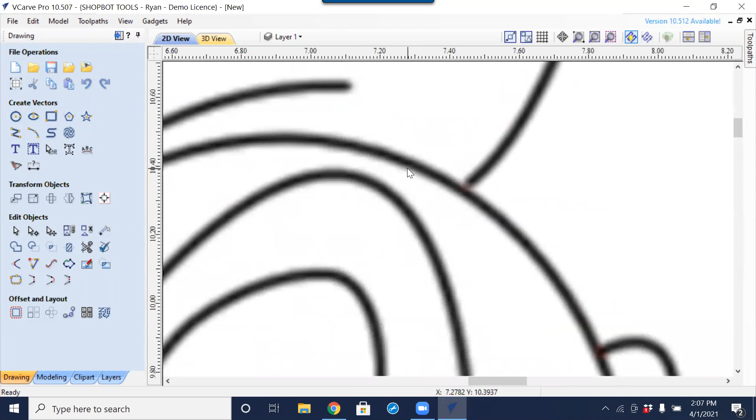This is a fairly clean drawing as far as the pixels go, so you might think this is going to be awesome for us to use the automatic tracing feature. And you would be right, other than the process to get all these pieces to fit - the automatic way ends up costing us a lot more work, and we'll see why in just a second.

So we're going to first do the automatic tracing to show you why it doesn't work, and what we would have to do to clean it up. Then we'll take a step back, undo all of that, and work the way we need to have it. VCarve does have an automatic way of making a bitmap trace, which works fairly well, especially on a clean image like this. I'm not going to adjust any details since we don't have too much noise - it's fairly clean. So I'm going to go ahead and click preview.

And it's done a decent job of it. We'll go ahead and apply. So it has created our vectors, and fairly cleanly. Even going into node editing, so we'll ungroup those. We see we have some nice smooth vectors that are going around.

But remember, we need to have these pieces fit together like a puzzle. And one of the things that the automatic tracing does is trace along the outside and the inside of the shape. So this would work great if we just wanted to do a V-carving of them. We're just going to see how that works, just to see how cleanly it would have worked if we didn't want to do the inlaying. And yeah, it doesn't look too bad. Looks like it would have done all right.

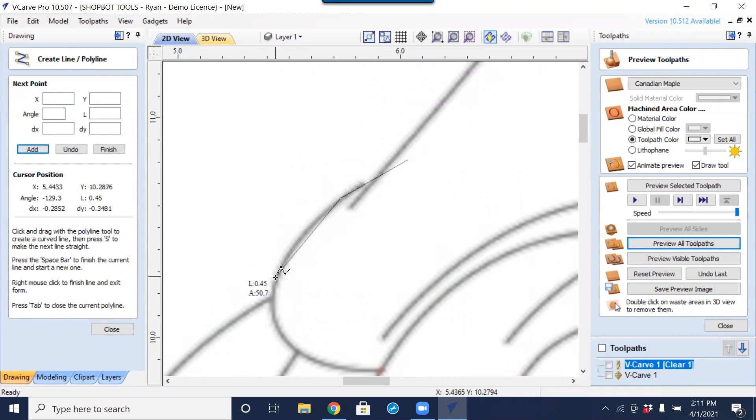So anyway, we're going to start right here, and I'm going to click out a little off of that part, just drawing out lines. I'm putting the lines in, and later I'm going to convert these lines into curves. So I'm clicking on the areas that I think are the start and end point of an arc. And I've already messed up. So let me back out and just undo and start all over again, because I want just the hat. I started going a little too far around the head there.

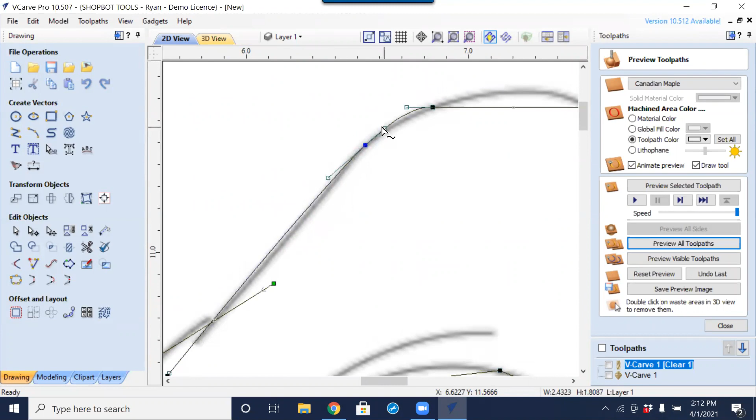And if you're not real precise with the placement of these endpoints, that is okay, because we are going to use node editing to later fine tune these shapes. So coming back to the beginning, there is the hat, going into node editing. And I'm not sure how I feel about the new method of when you're drawing, how you're able to draw lines and convert them to a Bezier as you go along. I'm not certain I'm happy with that.

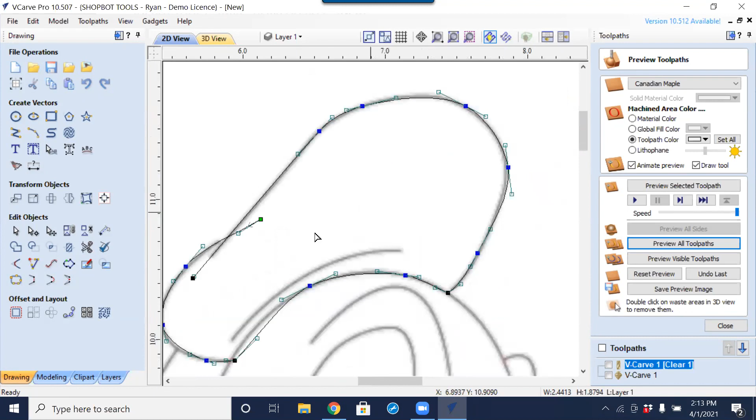But that is maybe just me. So I'm going around clicking the letter S, and the S is for smooth. I know that's smoothing because when I right click over top of a node, I see smooth point, and there is the S. So that means you could just hover your mouse over top of any node and it's going to smooth it out. And once we have that part done, the hat is about done. We're good with that.

Going to escape out of the node editing, use the scissor tools to trim away the overlapping sections there. Later we will put in maybe another vector here to do a V-carving on. But right now we're just separating the parts like a chunk for color separation.

Going to run through the same process. Tab. Again, if anyone has any questions while I'm doing this, please ask them. So at this point I'm not going to close out. I am going to just escape out of the line tool now and fit these vectors with those being overlapped.

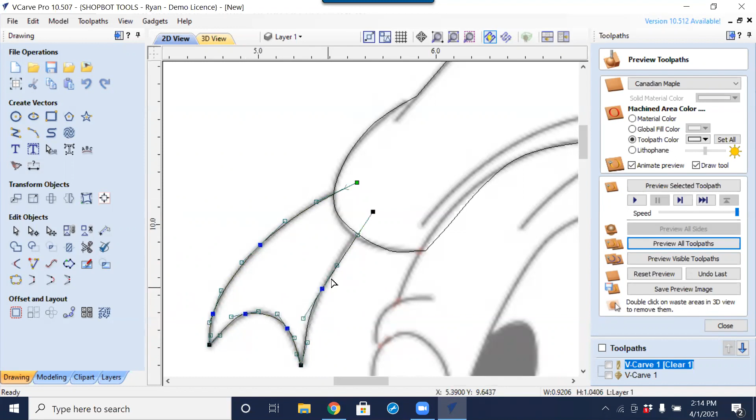So again, just using the S to smooth these shapes out and then move the control points to a location that best matches the shape. I'm going to modify, node edit the hat just a little bit more. I see it's off there a little bit, and also off the top of his head. Needed a little adjusting and fixing.

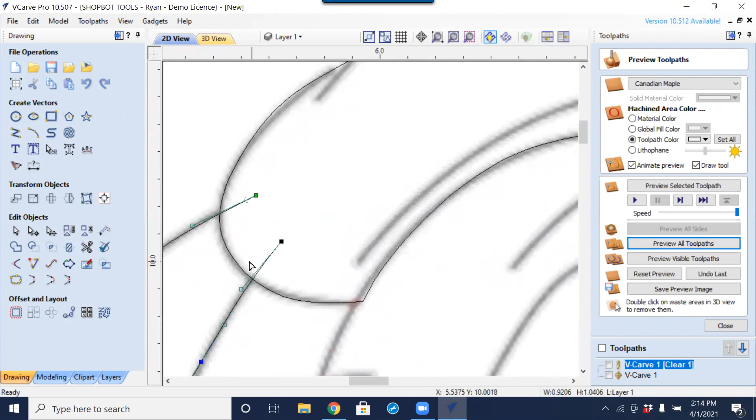So that is basically two shapes. Now, to ensure that we have the same arc for when we cut this tab out of a separate piece of material from the main part, we need to make sure that these two arcs are identical. So I'm not going to trace this line, we're just going to make a copy and duplicate it. So the way I do that... oh, look at that, I'm off there just a little bit more. So I'm going to use the right arrow to bump that over, and then there we go.

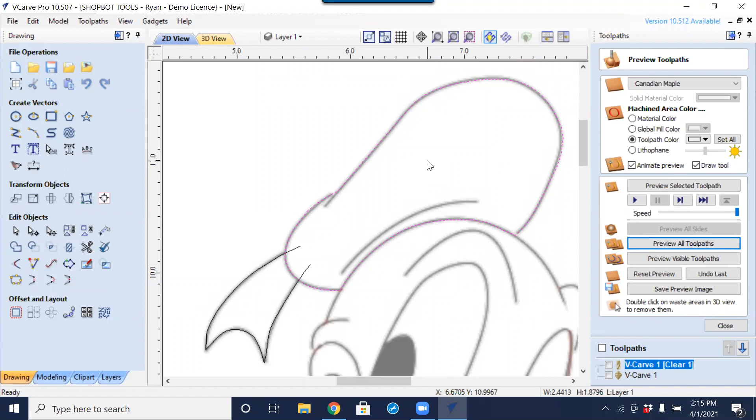Selecting the main outline that we have here, I'm going to do a Control C to copy that to the clipboard. If I did a Control V paste right now, that would paste a duplicate copy directly on top. I'm not going to do that just yet. I'm going to take a couple trimming actions, and then we will paste that back in.

Use the scissors to trim that section away. So we've lost the hat, or so it seems, and only have the connecting tail here. At this point is when I'm going to do the Control V, pasting that back in. So we now have the main hat, and we have overlapping vectors at this point, but that's exactly what we want, because later when we're finished with our design, we are going to separate them into separate pieces.

Let's work on the top of his head at this point. The way you want to think about how to do this is based on the material we're going to use. So we're going to trace around the top of his head, the top of his beak, up around his eyes, and finish the top of its head. Let's see how that works out.

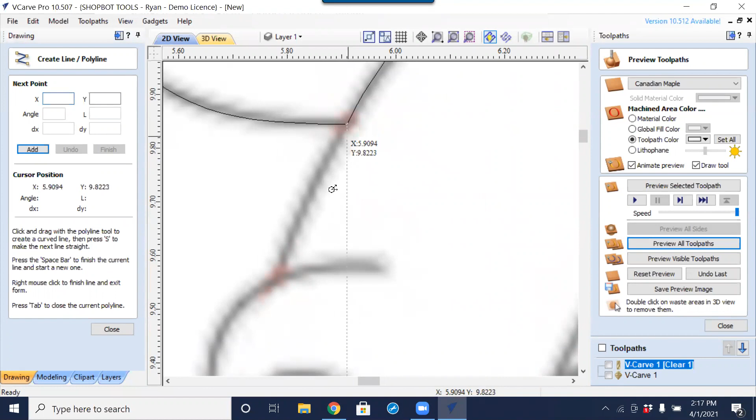I'm going to use the object snap to snap at the endpoint of that line. And this is where, see, that was that automatic tracing there, which sometimes is helpful, but for me, I prefer not to have it. There it is again, so I didn't want that to happen. I'll explain after I finish going through this what is going on with that. I should have paid a little more time to see if there's a way to shut that feature off.

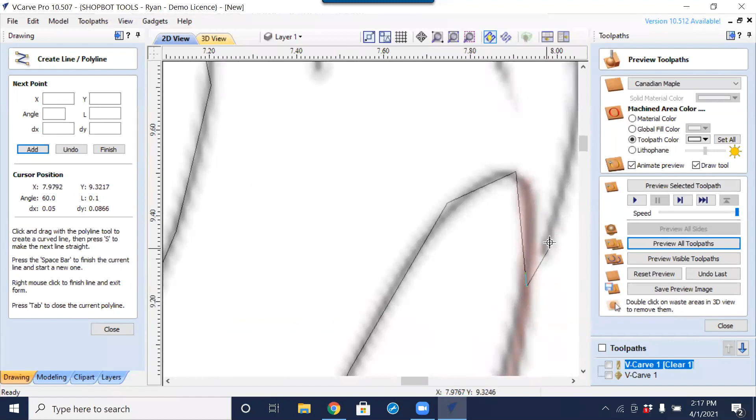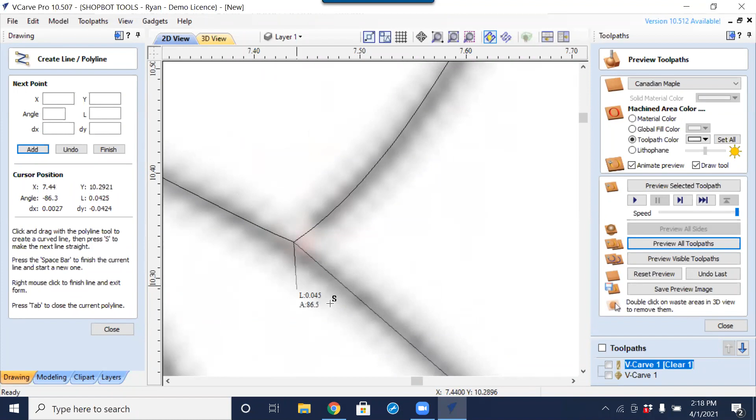So zooming in is the scroll wheel, zooming out is also the wheel. Holding the center button down allows us, when we're zoomed in, to pan around. I am going to snap right there to the endpoint of that. I'm going to escape to close the line function tool and run the same type of node editing that we were doing before.

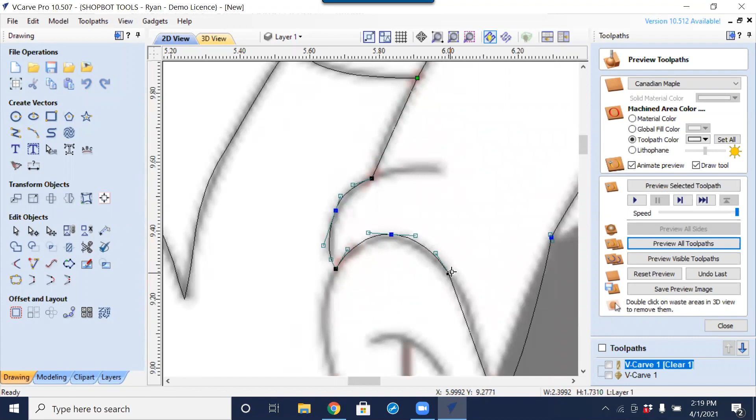So I didn't do a smooth, I did an arc there. Sometimes I do not a smoothing, sometimes I do an arc to get that somewhat close, then come back, convert those two arcs back to a Bezier curve, then smooth. Sometimes it saves a little bit of steps. See here, I need more of a sharp point there, so I'm going to convert this line segment back to a line. And then we could go about smoothing.

It is possible to do a sweep select and smooth more than one node at a time. So we could select both of those and just type the letter S. You don't have to do them individually, although I tend to do that most of the time.

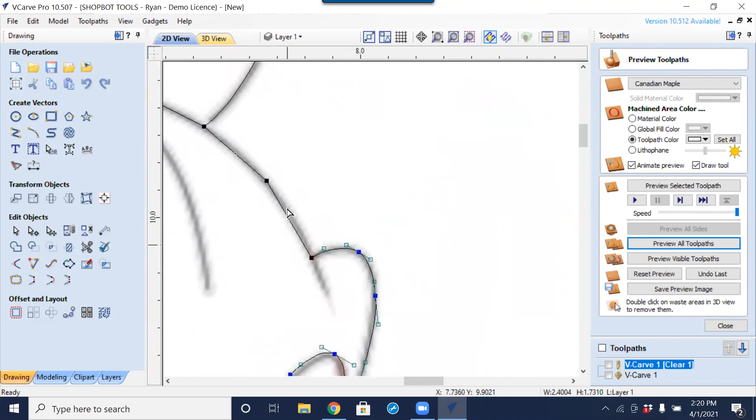I'm not sure I understand the question, but I think the answer is yes. There's probably a way of doing that with the automatic trace. So I could go in and delete all of those lines - we'll come back to that. Now I get what you're saying, and delete all the inside lines. You could, but then you have some extending lines to deal with, and I'll come back to that. That's a good question - I kind of skimmed over that and didn't fully explain the challenges of the automatic trace.

So now with that completed, we want the top part, the hat, top of his head and the hat, to have the same exact curve. I'm going to go through the exact same process as I did before. This is where you start having to really pay attention to know where the overlapping parts are, and pay attention to this area here as we do this.

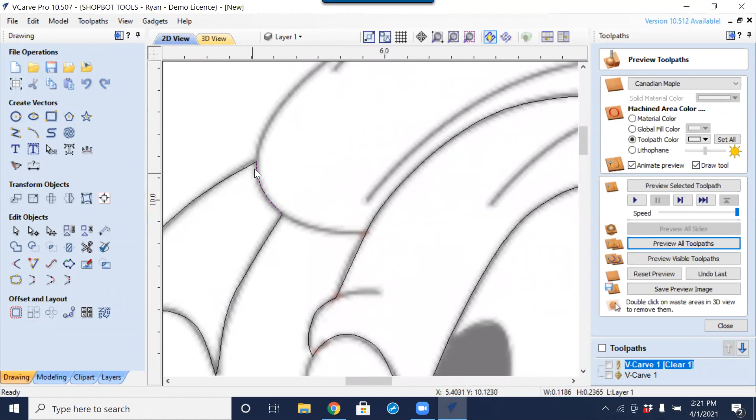I'm going to do a Control C to copy that to the clipboard, then use the scissoring tools to trim that away. So it looks like that's what we're done with, and it looks like we're ready to paste in. But remember I said pay attention to this area right here - we have a little bit that'll end up causing us some grief a little bit later. That's just a little arc right there between there that the trim just didn't take away. I want to delete that because we don't want little overlapping and open vectors like that.

So again, always pay attention to where things are. Going to do a Control V at this point, and there it is. One thing I will mention that hopefully is obvious - when you do that Control C copy to the clipboard, you want to be cautious not to copy anything else to the clipboard, because you've lost what you've done.

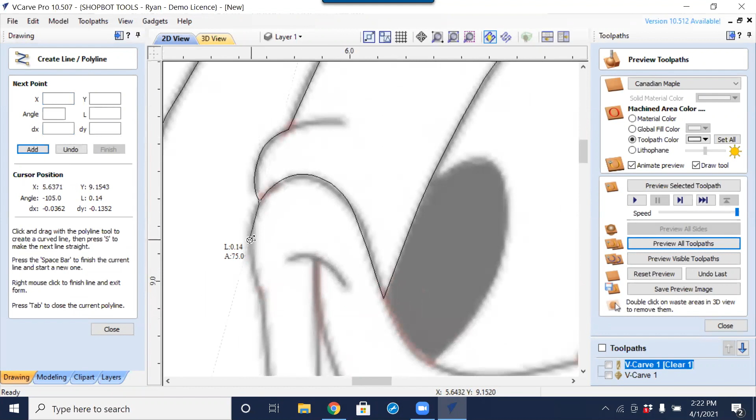And the next time we trace around his beak and his mouth here, I'll show another technique that we could use, maybe a little bit of insurance to know that we're getting it right or not going to lose something here. So again, going to snap to the endpoint here. Just go around.

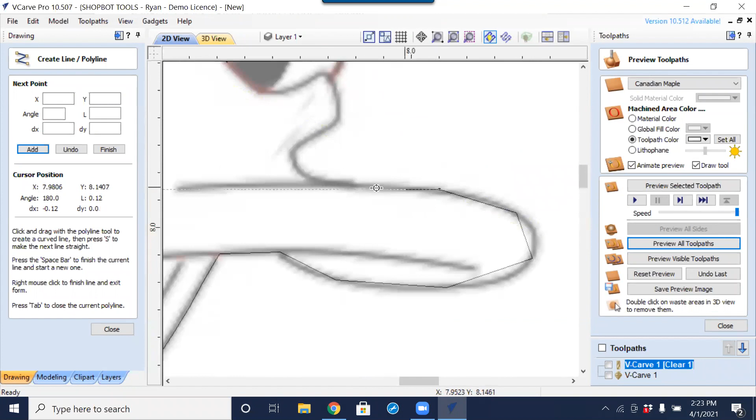So the automatic tracing is definitely a nice feature, but at the same time, it sometimes causes you more work and cleanup than the process actually saves. It's hard to know when that is, because sometimes you get so into fixing the automatic trace or cleaning it up that you lose track of how much time you actually spent doing so.

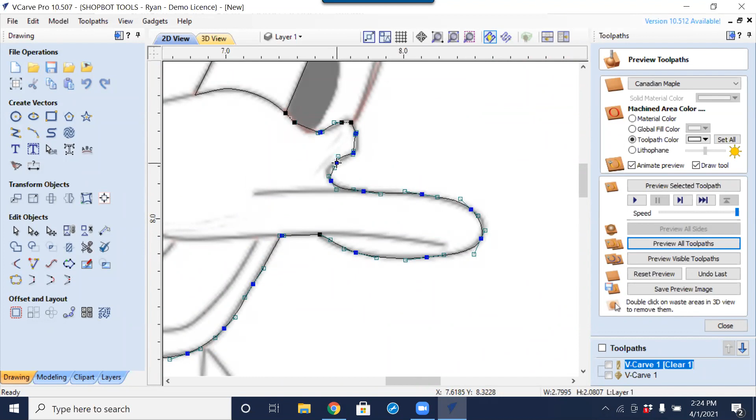All right, escape out of that. So going into node editing, going to go around and smooth all of the points out. And as we're doing this, we also want to pay attention, since this is somewhat of an inlay type, we need to start thinking at least about external and internal radiuses. What bit are we going to use? What size are we going to be making this item? Making sure that that curve is going to be big enough for a cutter to get into that location.

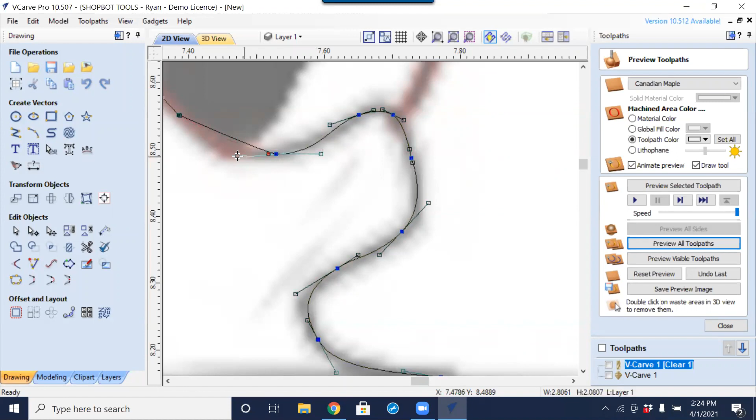Sorry for my silence there. That was me concentrating.

All right, now one thing I do not want to do is make a modification to this one here after I've made this connection, because we need to have all of these together and fitting together. So with that done under the eyes, actually I shouldn't have stopped where I did. That's okay. We have that line tool that could just easily be opened and finish that out. All right, so since I did that separately, I'm going to put both of those. No, I did all right.

All right. So now the trick, and one thing that we can do, is right click or just open up another instance of VCarve Pro. I'm going to create a new file and say okay. So we just created this section here that I want to be able to map in with this section on top.

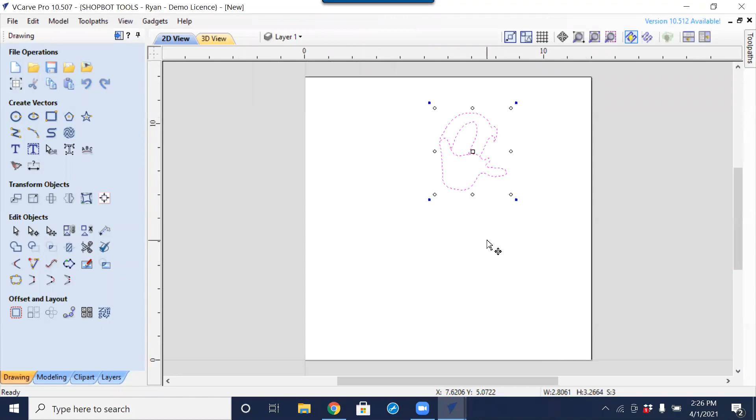So I'm going to do a Control C, going over to the other instance and a Control V, it pastes it directly back in, and it is in the same location. So it's very important not to have it relocate or drag and drop it in a different location. But this allows us to now separate that out a little bit and trim those sections away and do a Control copy. Coming back to this version here, we do not need this section or that part there, and do a Control V, and that pastes that back in.

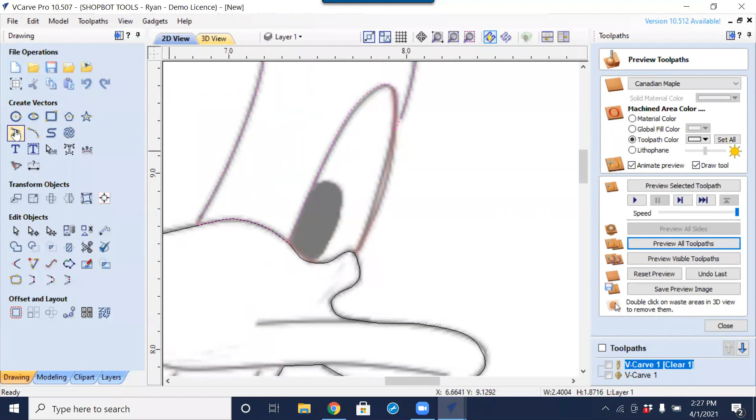So once we start getting more in depth into getting them aligned, you might need to bring them outside to be able to bring them back in. I'm going to do the exact same thing for the eyes. And it is very easy to get lost and confused on what things are, because it looks right when we're looking at it here, but when we go to bring it over into that other instance, it's kind of hard to figure out what's going on.

Okay, so what we're going to want to do is make the eyes their own little separate pieces. Going to do a Control copy, coming back over to the other instance that we have open. I don't need that on the screen, and paste that in, and use the scissor tools to get rid of everything that we do not want.

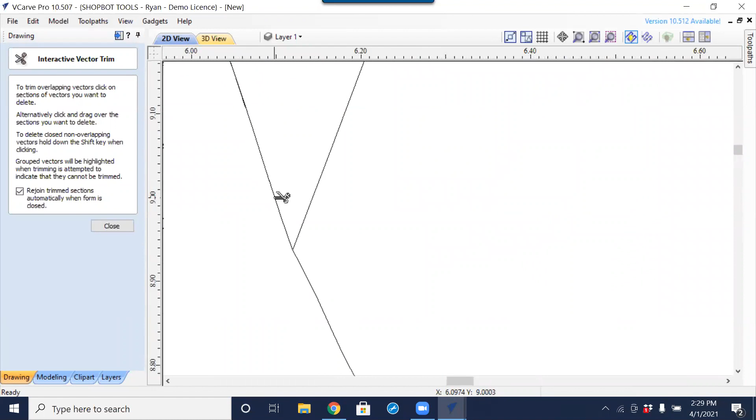Now we're left with the challenge to figure out what's really going on here. You see how this isn't quite finishing around to that point, and up top. So let's go into node editing. I'm going to select the nodes at the endpoint of that. Right click and select cut vector, but I'm going to remember that letter C. So that allows us to just delete the cut section there.

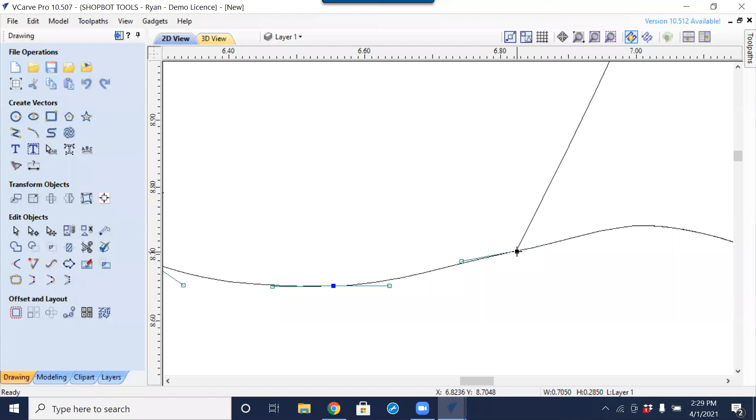Again, node edit, and I remembered that C, so I'm just going to type C for cut and delete that section there. And see, we have an overlapping vector there as well. Go into, again, node editing, cut.

So there are the two separate eyes. Do a Control copy and Control V, which we're not going to see any real difference here as far as the overall picture looks, and the reason for that is we're just basically duplicating vectors, but to get them separate.

I am going to remember to save. I should have done that a long time ago, because I hate doing work twice, although the second time I do it, it definitely could get better.

Layers, Paul is recommending layers. Absolutely, that is another way to help keep things in line and organized. So organization is really the key that we're trying to do, keeping it separate and only working on one area at a time, because it's very easy to get lost and get little bits and pieces hanging out there that'll end up causing you problems later.

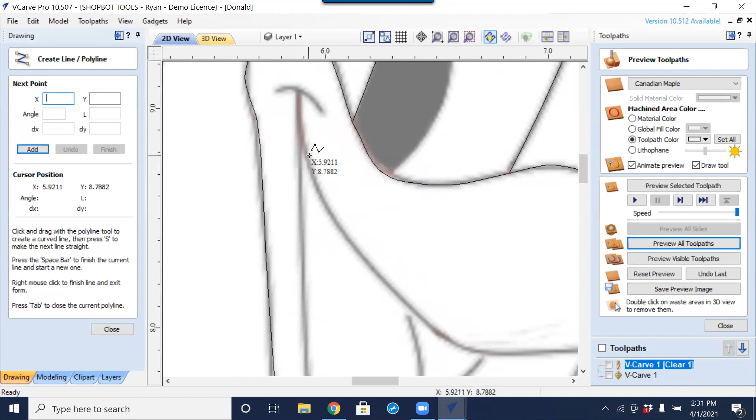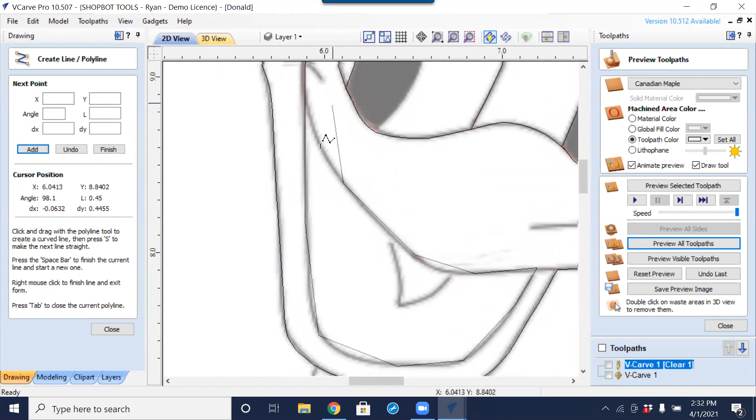This is also an area we have to pay attention to, regarding what cutter we're going to be using, because starting up top is going to give us a fairly sharp inside corner, and a round bit with a square corner isn't going to work for us. But I'll worry about that a little later when we go to start planning the tool paths for this.

And just using the S key to smooth those out. I could have selected all the objects that I wanted to have smoothed.

I accidentally hit the page up button. Yeah, that separates there, so not what I wanted to do.

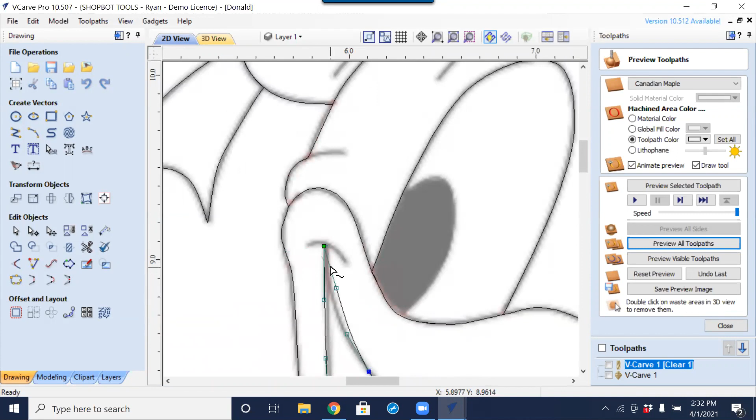For fine tuning, rather than using the mouse to move these around, just the arrows on the keyboard also are able to kind of bump those nodes around, those control points. Sometimes it's easier to have a little bit finer control that way.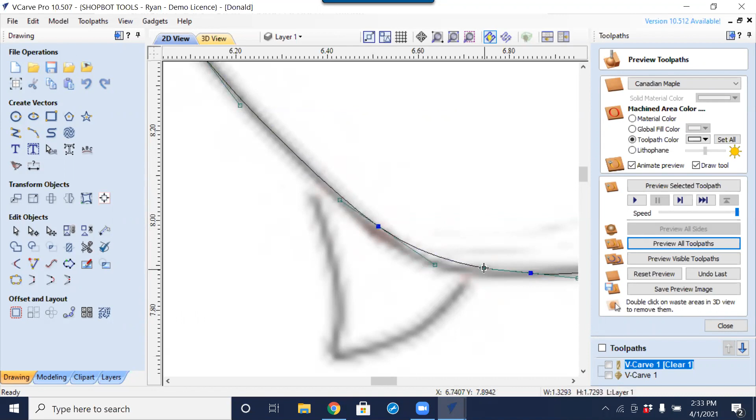All right, getting closer.

Now, before I trim those away, sometimes that could get me in trouble, what I just did there, because I end up needing to be over top. So I'm going to undo that, and we'll hopefully understand why. I'm going to create the shape down below first, because sometimes you might move the node on top that's outside of the area first. So that kind of matches up pretty good now.

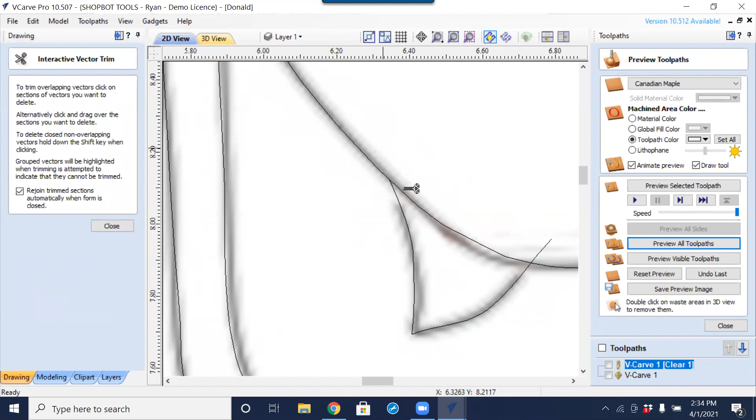And then just use the scissor tools to get rid of that. This is a fairly simple trimming process, so I'm not going to copy to the other one, but again, Control C to copy the inside boundary of his mouth, do a trim, and then a Control V. So now I think we have all of that.

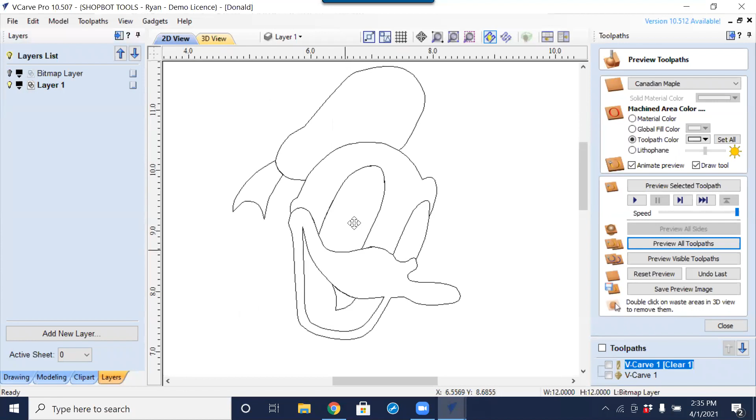Yeah, the only thing maybe we should do is copy the black eyeballs in there. So let's give that a go.

I'm going to undo that just because that's automatic. So what that is and what's happening, let me just kind of show. When you're tracing, if you drag as you're moving around, keeping the mouse held down, it converts automatically lines into smooth Bezier.

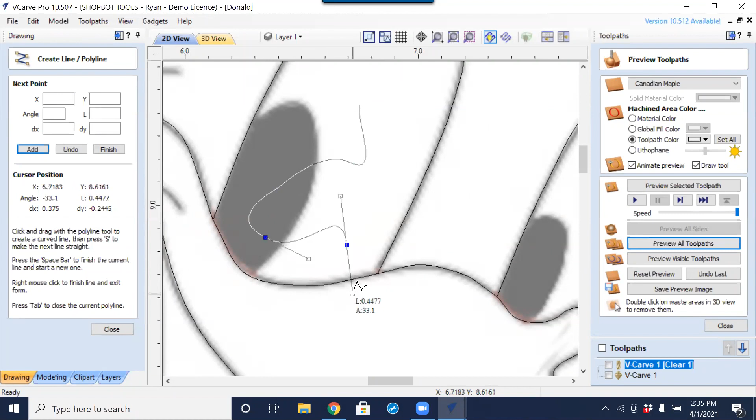It's something I should maybe practice with some, because I could see maybe it could be more useful and easier to do that. It's just new, and most of the time I'm excited about change. I like change, but sometimes I'm just used to something and it's the way I like it to be.

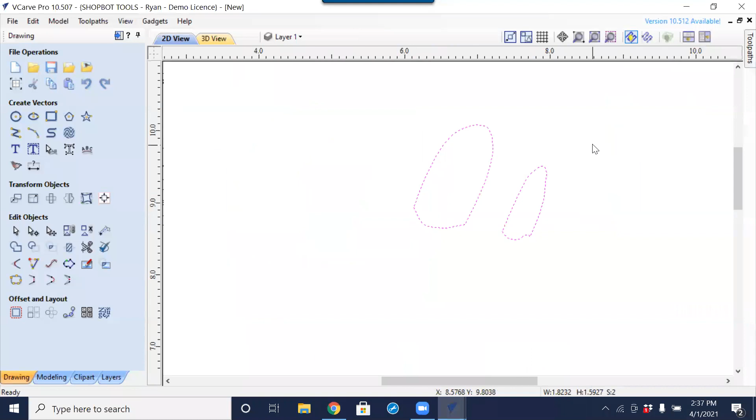All right, so this one I am going to do a copy and paste. So I just did a sweep select, select everything, copy, go over to another instance here, delete what's already on the screen, and paste that in.

Looks like we might have some duplicate vectors that... alright, so let's see what happens.

Delete everything that we don't want. Sweep select, control copy, and control... oh, let me undo that because again it's leaving those little bits in there, which would have cost us some time later on. So now paste that back in.

So now we have a version of the outline of all the different components that we would want to have cut in a different colored material. There's some details that we could maybe fill in and see how they work.

You know, a little crease in his hat right there. So I'm just going to finish that up now. You know what I'm going to do? I'm going to expand a little bit and see how that clicks in.

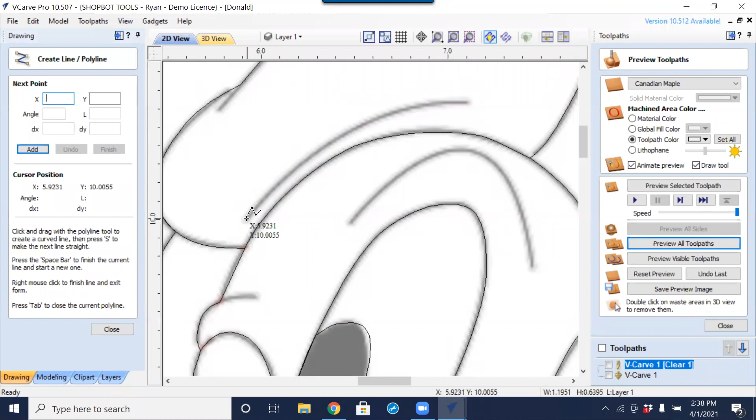I could see maybe you could get used to that. Yeah, that's a skill I think to work on, but you could see I at least tried to change. Eventually I'll probably find an easier way of managing that.

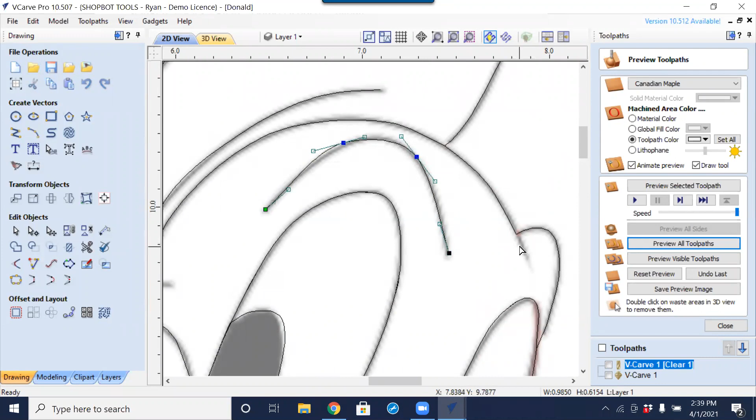For the extensions here, going to do right from the end of that line out. Put that on a very slight arc. Another one, top of his hat. Later, maybe create a little engraving V-bit line or just some sort of engraving to show what this looks like.

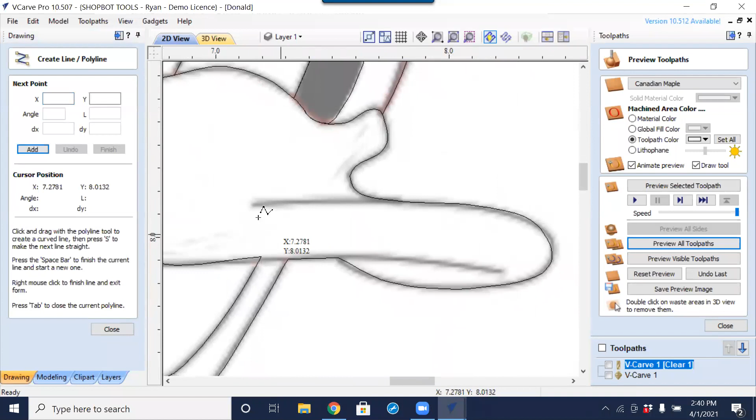Just around his beak now. For this one, I'm going to actually extend it way out beyond, edit and convert it to an arc. The reason I went out beyond is to get a trim rather than trying to snap to a certain endpoint there.

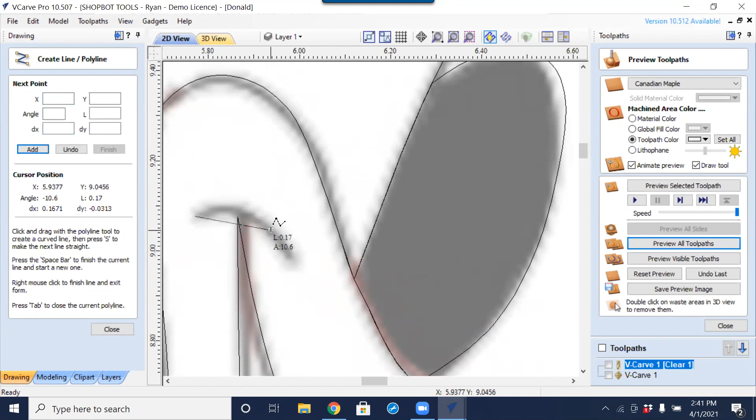All right. Now, oh, almost one more. We want to really try to make sure that you get all the detail done now before we start breaking this apart, because then later we're not going to have the picture to align it to anymore.

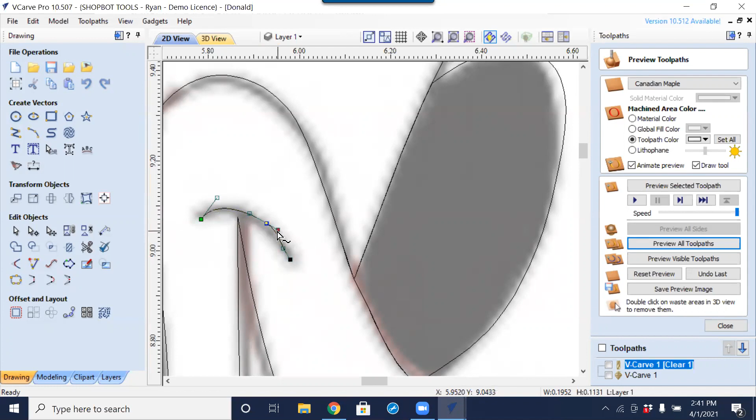We still have to figure out. I'm not sure what we're going to do in this area here to create that sharp inside corner. I don't know. There are techniques that we can do with it to be able to get that sharp inside. That's the V-carving type inlay, which is kind of another tutorial in itself. It is one that I've not personally attempted yet or ever tried, but it would give the ability to create that sharp inside corner of his mouth there.

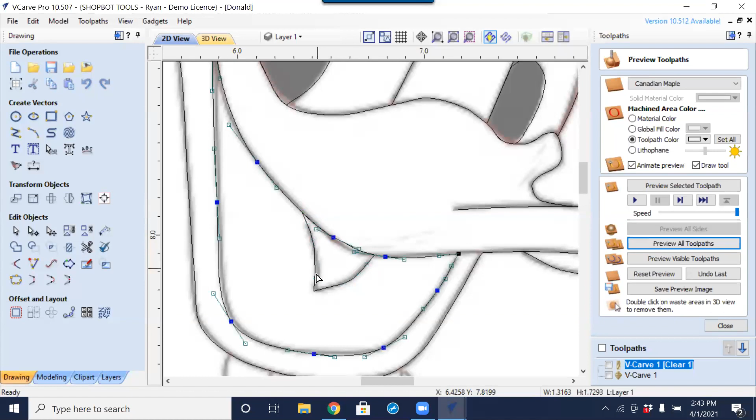I'm just noticing this area should be connected. Where it could get a little bit challenging: we have a node here, so if I move this node here, it's hopefully not going to affect anything over there. So let's just see what happens. Oh, I'm good. So if any of the arcs moved over in this area here, we would have to make sure that we make the same arc change through this section of both pieces to keep those the same. It's going to continue a line straight through there. No, just leave it as a straight line. We'll never know it.

All right. Again, save. And sometimes at this point, I might even do a save as, and call it Donald 1 and save. So now we've kind of locked that version in time, so if I get completely lost and confused on what things are and where they are, I could always come back and revert to it without having to do multiple undos.

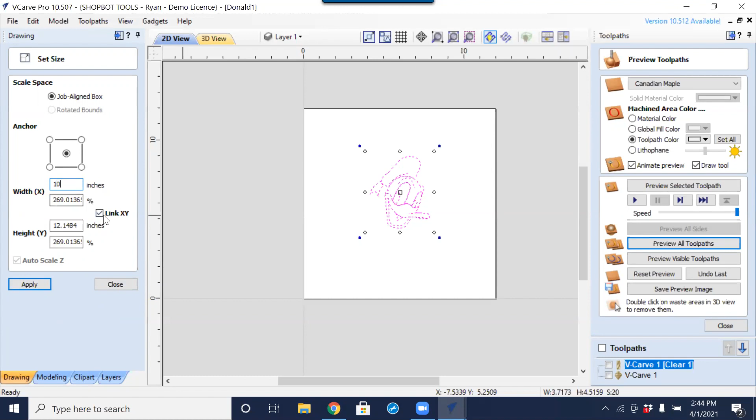So now we could start thinking about what overall size we want this to be. I don't need to delete the picture. I'm going to go into the layers and turn the bitmap layer off. And let's say we want his head to be a 10-inch total size. So this point is when I will run the object size and set it to be 10 inches. Having the X and Y linked, it will proportionally change both. And well, we can't do 10 inches because the Y is too high. So let's make it 10 inches in the Y. There we go.

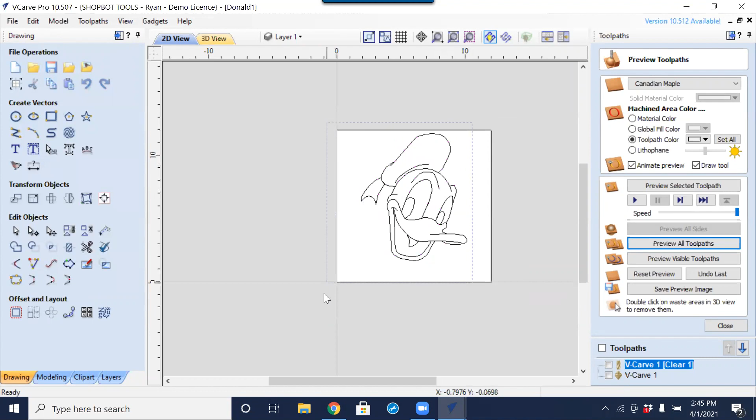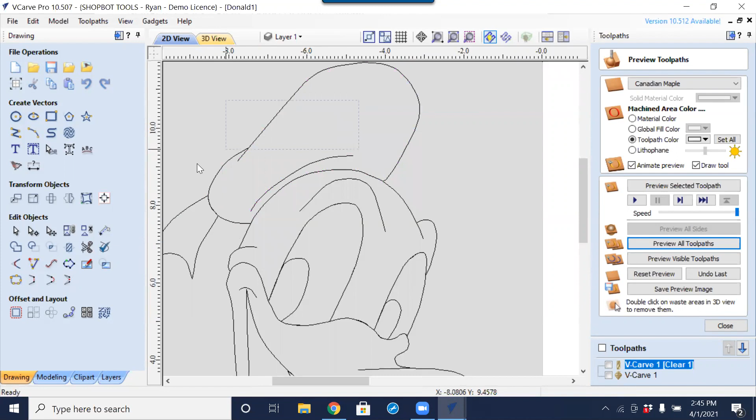All right, so now we need to start separating and pulling this apart. And I think we'll start with the issue that we're going to have right here with his mouth about getting this to fit. So all of the vectors, I'm just going to shift those off to the side. This is when layers might really come in handy, because there is a hat. We could move that to a new layer and help keep them together. Another way to do it is grouping that together.

If you ever want to know what Donald looks like without a hat, there it is. I don't know if I've ever seen him without a hat.

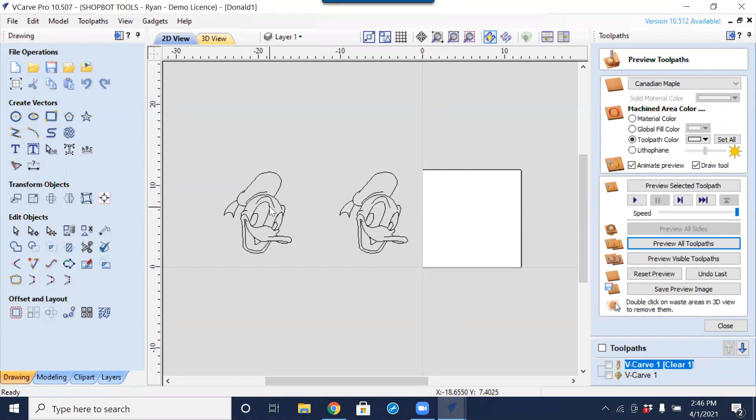Thinking ahead, because I'm breaking this apart, I may not know exactly how all these parts need to go back together again. So before we break this apart, let's just make another duplicate copy. I'm going to keep that attached and not separate this one here. So again, that section together. There's a problem right there that we need to fix, but that's okay. I think we could still do it.

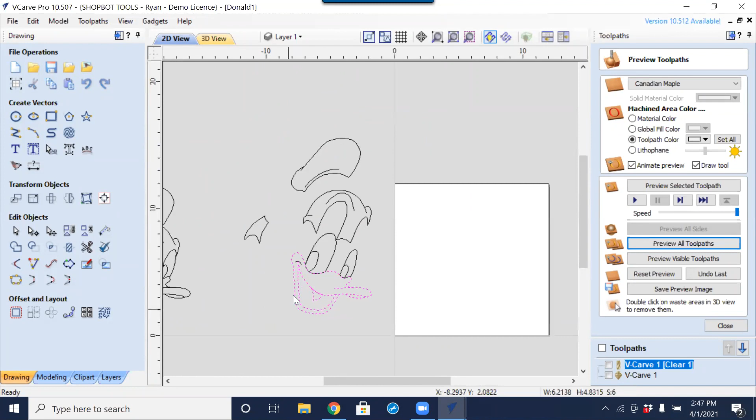Hopefully you understand what I'm doing here. So the issue that we have is the eyes. The eyeballs are good. This outer side is not. So what we need to do is trim some of this section away. So I'm going to just do a control copy there on the eye. Let's see how this works. That didn't work out so well.

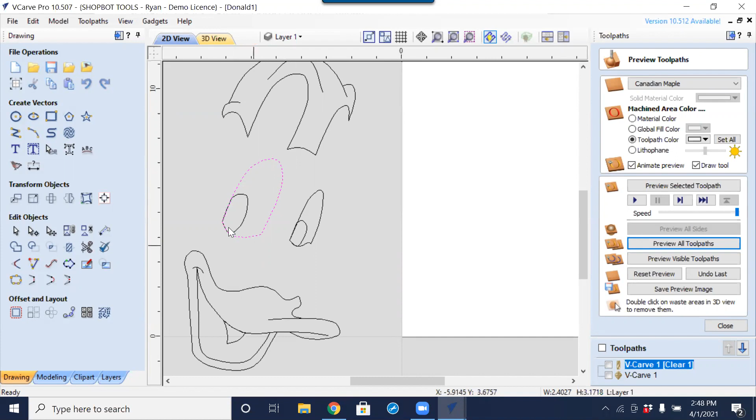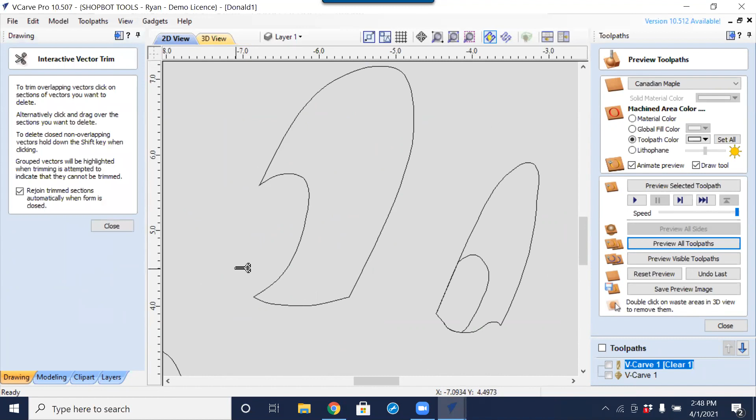So what I'm really trying to do here is, we see how this continues all the way around. It should not continue all the way around. We need to have this part and this part be the same. So I'm going to go into node editing and see where those points are. And luckily, we do have endpoints there. So I'm going to do a control cut and a cut there, which now left us with this bit here. We could cut out and remove that. Hopefully we have the same kind of thing happening there. Sure enough, we do.

And of course, what I'm going to have to do is undo everything that we just did there. Well, actually, no, we don't, because, I wish I could say I was smart enough to make this duplicate for this reason, but we just got lucky that we could pull those over to there.

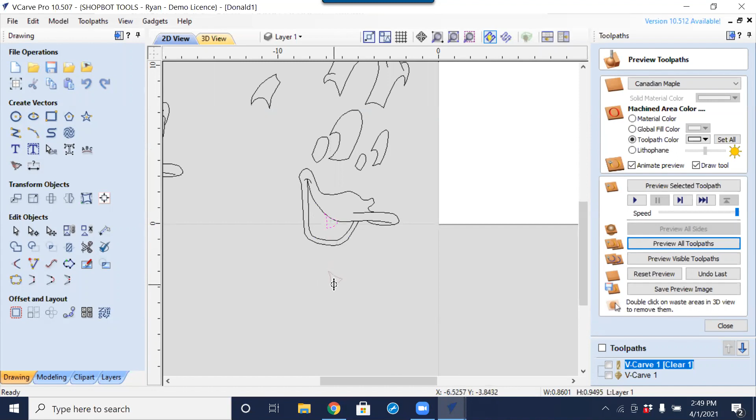All right, so now we have all of the pieces that we need to cut. And all of them need to be cut out separately. And they all need to, one more piece that we need.

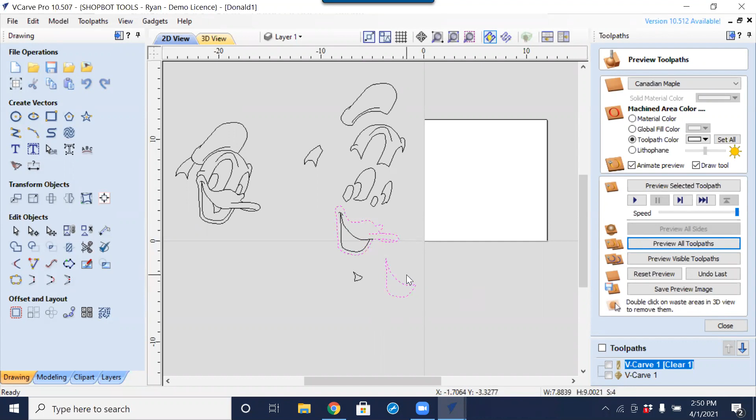So there, I think, are all of our pieces that we need to start laying out and verifying the toolpathing is going to fit. So let's just look at these two areas here and see how they work, because the inside corner there is where we're going to have the biggest challenge in being able to get them to look right when it's done. So if we cut on the inside here, which is great, we're not going to be able to get all the way up into the sharp corner here.

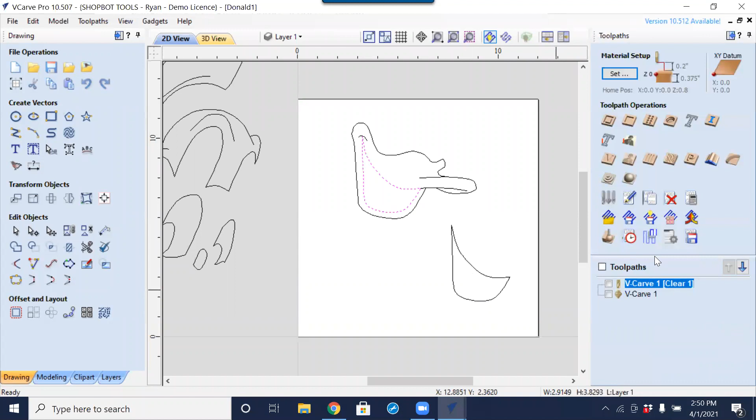And if we cut this out on the outside to inlay into this section here, it's not going to go all the way up. Well, let's just take a look. So first, we're not going to use the inlay tool, but we will come back to it. I'm going to do a profile cut. What our Z is: I just typed in the letter Z and then equals, because we do want to cut all the way through. And do an 1/8 inch bit. It's a fairly small bit, but we should be able to do that just fine. Cut on the inside.

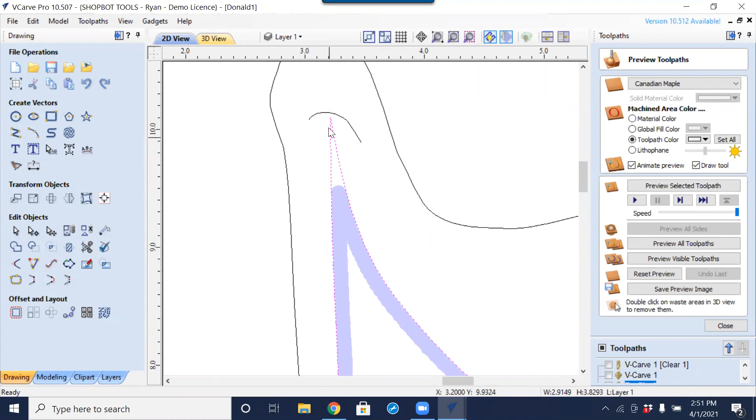And come back to the 2D view. I'm going to toggle the solid on and off, just so we can see what is actually going to get cut or what is not going to get cut. So we can see this whole section up here is not going to get cut out. But then if we also cut this section out here and cut this one on the outside, we see it's going all the way up and around.

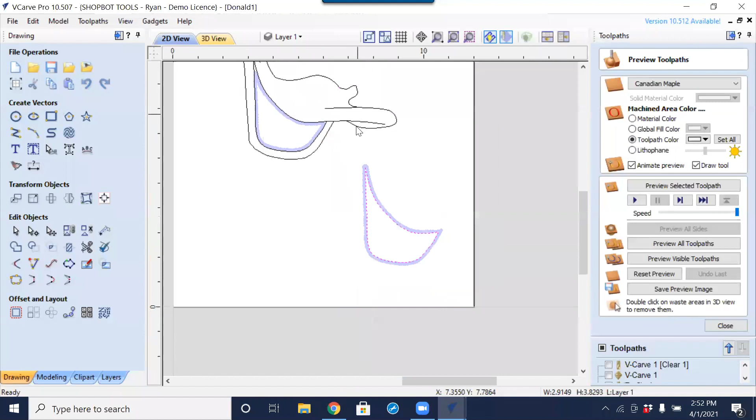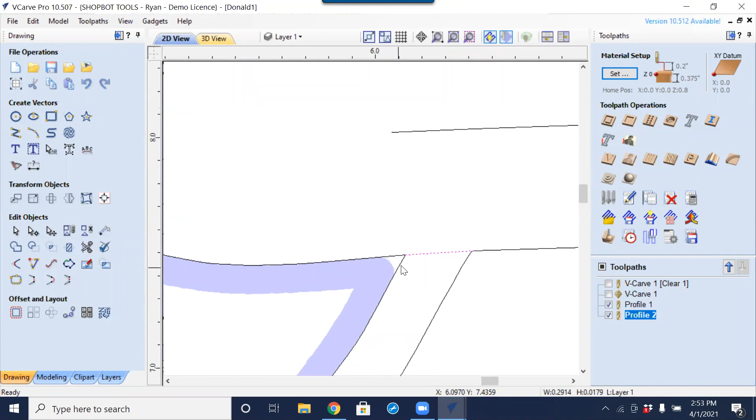So if we cut this out, it will not fit because we need to have it trimmed off here. So that is where the inlay toolpath really functions and works well. There's a couple other tricks that we could do as well if we didn't want to do the inlay toolpath. There's another section that's not going to quite fit there either. So many steps prior to where we are right now is when we really should have been thinking about what cutter and how we're going to plan these curves and fits. We can still make some modifications to this, and that's okay since that is separate there.

So again, let's take a look at what the inlay toolpath is going to do. I'm going to delete everything that's in our list, and use the inlay toolpath for this one. We're going to do it as a straight. One too far. It is a female and all the way through, because the female will be cutting on the inside of that. We want to do a conventional cut, selecting an 1/8 inch cutter.

You could work out toolpathing and bits and step downs and all that. I'm not focusing on that in this training here. So let's go ahead and calculate that. Ooh, almost. I'm glad for those warnings. I've saved my table many times.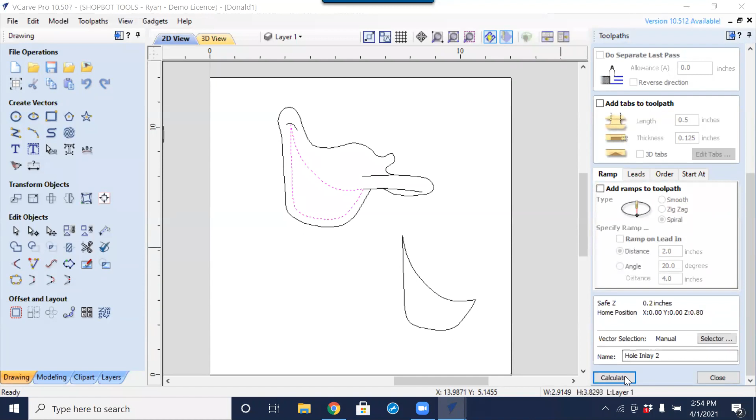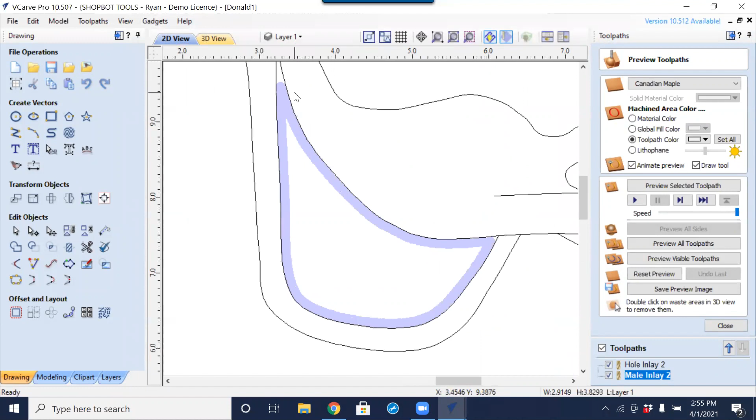So the female version really didn't do a whole lot different than what just the inside cut did. But when we toolpath this one as the male version, we're going to get quite a bit different. So this one, we want to do a male straight cutout, making sure that we select the exact same diameter bit that we used for the female version, the 1/8 inch. And we can see how that has cut it short. The reason for that is it's now going to allow this piece to fit into this piece that we have here. So what we have right now is a lot of toolpathing that we're going to have to really pay attention to in getting these cut.

And how many different colors does Donald have on his head? So blue, black, yellow, red, and pink. What I would do is start separating them into separate jobs. You might be able to nest them out on separate sheets if you'd like to do that. But I would probably open up another instance of VCarve Pro, create the same material size, setup, and everything there, and start moving all the parts that I want to have blue over onto that sheet and toolpath them there.

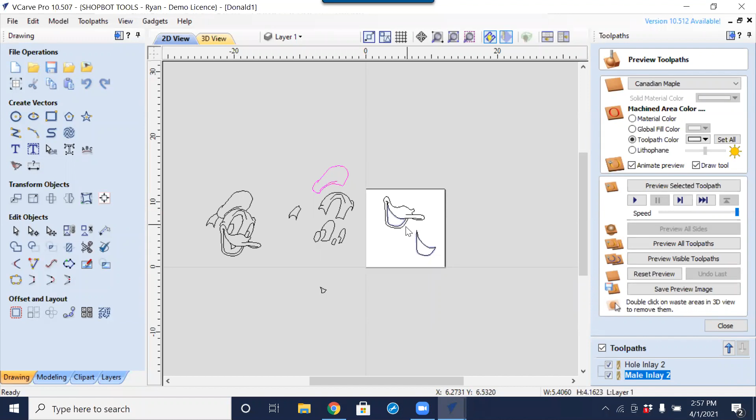But before I completely do that, I'm working through all the different toolpath strategies as I see them here, because it's a little bit easier to make any kind of modifications at this point, rather than having it too far separated. In some aspects, I might already be too many steps into the future to have saved me time.

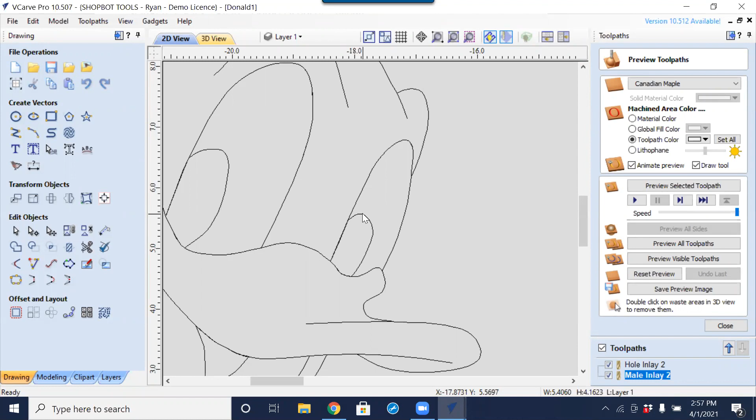That's part of the learning process of doing this. There are steps you may not think you need to consider at the beginning until you get to the end and realize it would have been nice to pay closer attention to needing to cut this out with an 1/8 inch bit, like in his eyes right here. That's another sharp inside corner. How is that going to be affected when we put these pieces together? Is there going to be a pinhole left from getting these pieces mated together? That's really where the art of this comes from—understanding how these pieces need to get cut and how the design needs to be changed to still look good while still being able to cut it with a large enough bit.

So hopefully this has been somewhat useful, and I didn't ramble on too much or confuse anybody. There's got to be questions out there, especially in a training like this.

Hey Ryan, this is Donald. I have a question. If you're doing something simple like this, maybe less pieces, almost like a little kid's puzzle for a 4-year-old type of thing—you're not trying to actually do an inlay, more like a looser fit—how would you tolerance the cutter to tell it to cut a little bit wider?

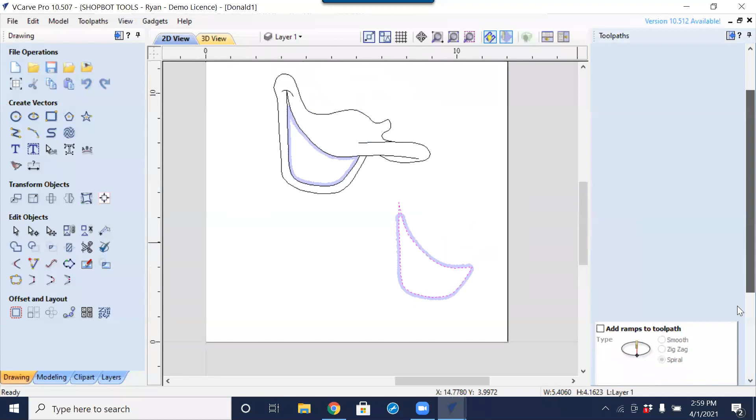That can be done in a couple ways. If we were running it with the inlay toolpath, there is an allowance that can be used. This is the allowance right here. I'm going to set that to 0.06, which is much larger than we need, just so we can see the extreme of what happens. We can see it's cutting 60 thousandths to the inside of that line, quite a bit farther in. So that opened up the tolerance a little bit.

Now, how much tolerance you leave depends on if it's a child's puzzle and what age. 60 thousandths might seem like too much, but for a toddler putting a puzzle like this together, that clearance might be needed to let it more easily drop into place.

So while somebody else is thinking of another question—I talked about the inside, outside, being able to do the inlay. If we didn't want to run this as an inlay, it's been a while since I've done it, but I'm going to use the offset feature here, cutting this with an 1/8 inch cutter. So we're going to offset first to the inside.

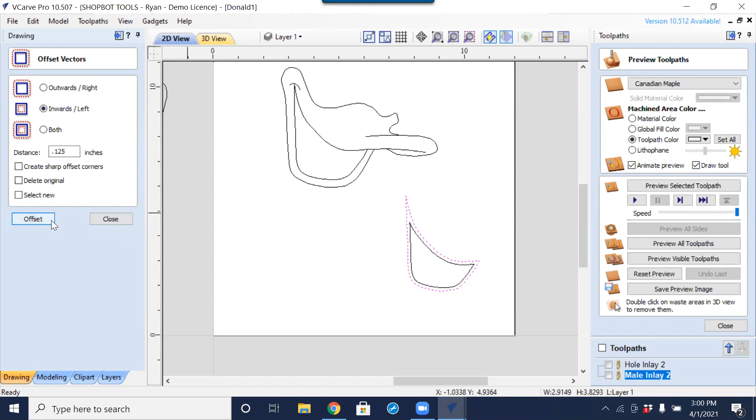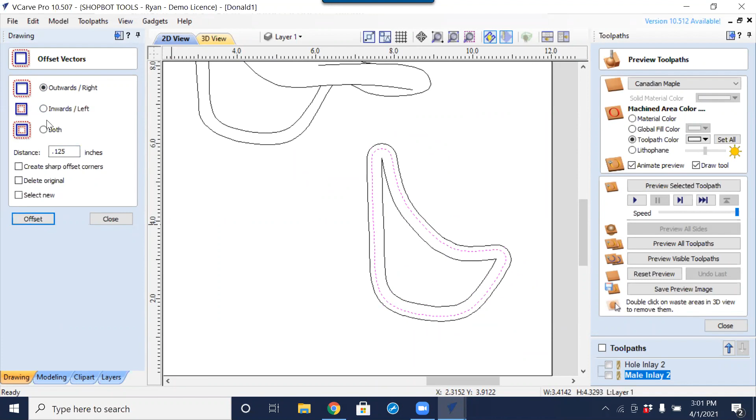We're going to offset it outwards by the diameter. Let's see if that one works. Yeah, that gave us the rounded corner. Now I'm going to start offsetting to the inside. Let's see if this works. I might have done it backwards again. Wow, I'm all confused, I'm sorry, I flubbed that one. But there is a way to offset inside, outside, and such—anyway, I apologize for that.

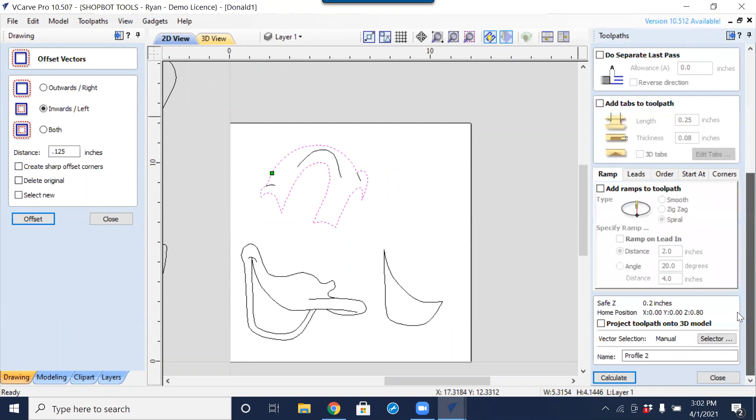Eyebrows—how am I going to treat the eyebrows? I would probably just do an engraving on that. So the outside border here, we would cut that straight out. Let's do a profile toolpath on the outside.

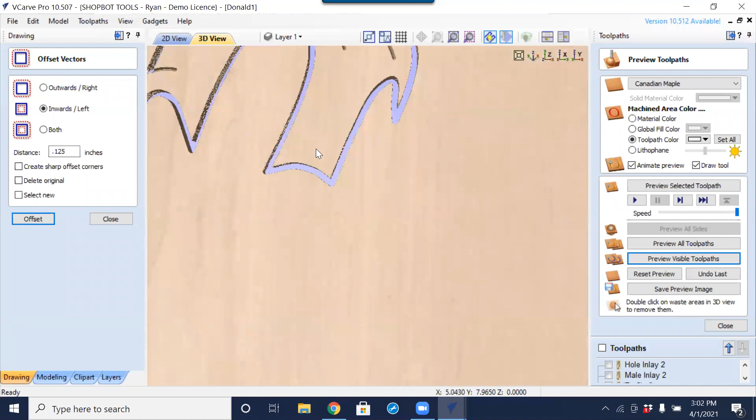And then for the eyebrows and all the little pieces here, I'm going to do another profile, only this time we're going to select a 60-degree V-bit, and cut just barely into the material, 60 thousandths, going along the line. Calculate that—all visible toolpaths—and that's going to give us these little line effects, engraving lines.

So hopefully that answered your question about the eyebrows.

Right now I have the material set to 3/8 of an inch. I had thought about cutting this out of HDPE plastic, because I happen to have some blue and yellow HDPE, and I think it might even have some white—if I had white, blue, and yellow, that would give us everything we need. Now if you have Aspire, you could take this one step farther and cut these individual pieces out, but also create the 3D shape and profile them, still having them all fit together, making it more like a relief carving made up of separate pieces. So that could be fun.